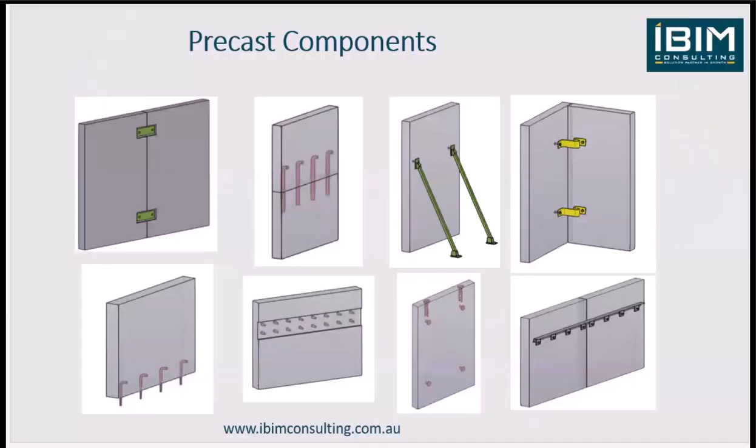Hi everyone. In this video, I'm going to show you how IBIM Consulting approaches precast detailing projects and how we stand out from our competitors.

These are the precast components generally applied to precast panels in the project: panel to panel fitting plate connection, panel grout tubes connecting two panels, panel rebate with ferrules, lifting tools, panel props, fire tie, and panel to raker connection.

Some of the connections are already available in Tekla as custom components, but we have developed in-house components to speed up the process. Let me show you—in the interest of time, I have already drawn the panels.

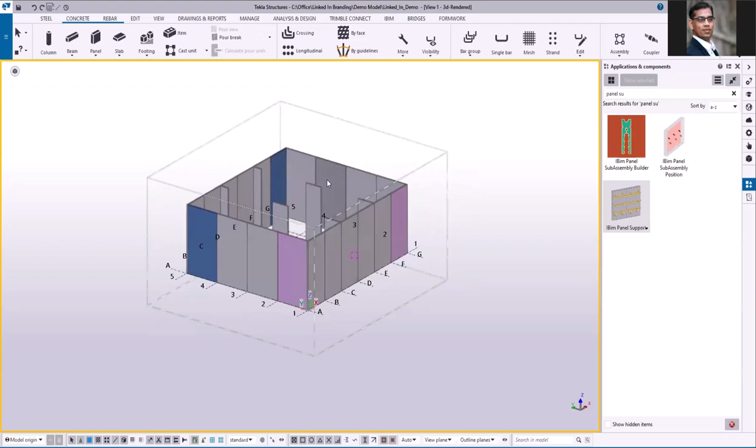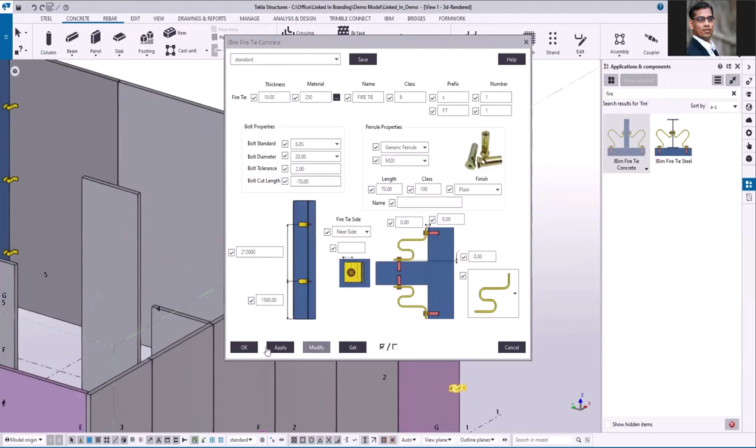If I have to create connections between corner panels, I can select these two panels and it will automatically create the fire tie connection. I can also use the same connection to connect these three panels.

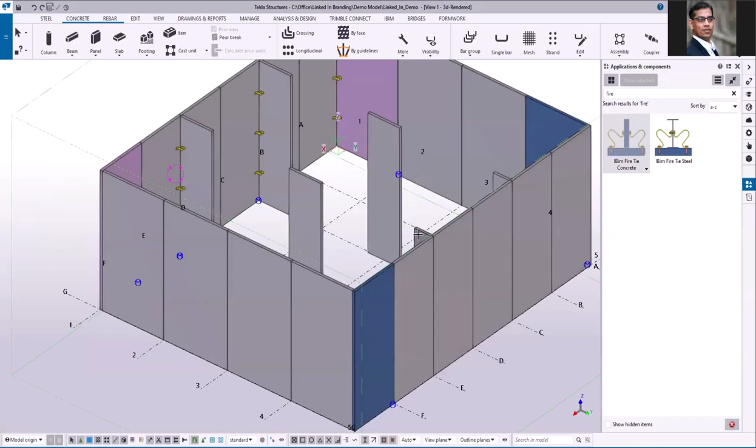The advantage of using this component is that it will also add ferrules to the respective panels, added as a sub-assembly, and it will read the top and form face, assigning the position as near side, far side, or both sides. Next, we will see how we can create a panel to raker.

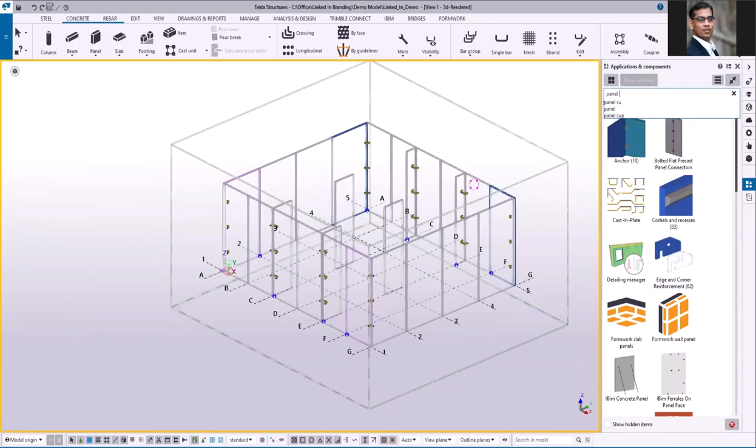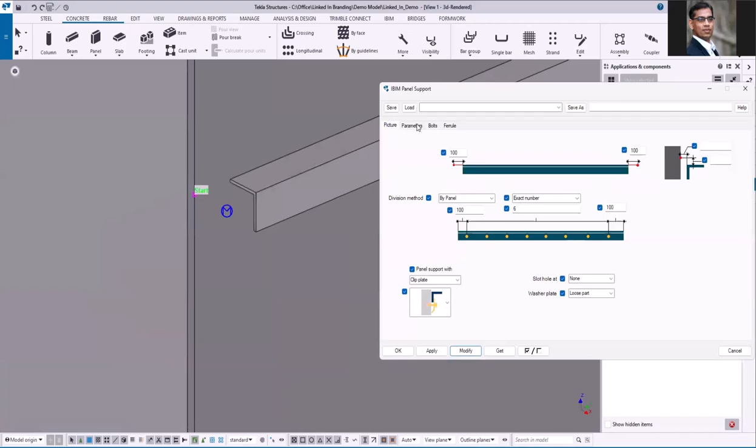Using the IBIM Consulting application, I'm going to pick these two panels, press the middle mouse button and pick the first point and second point. Let me double click and open the component, change this to inside, and then rotate.

This is quite common in warehouse projects where you will be placing the purlins on top of the raker. Let me select the next two panels—you can pick as many panels as you want.

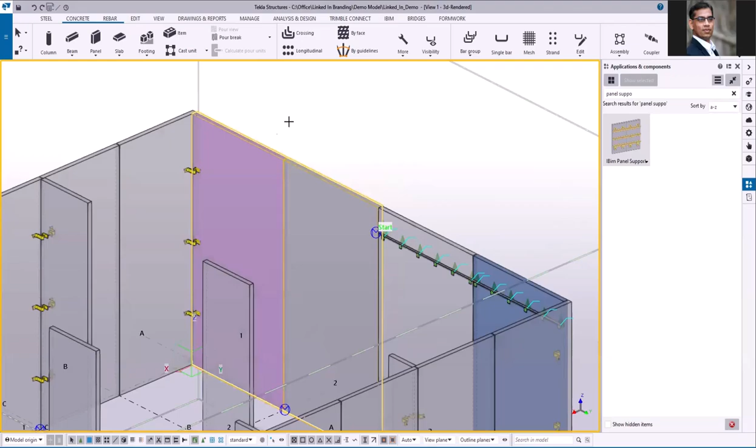If you want to change this to bolt instead of clip, I have an option here. And this has to be single side, not both sides.

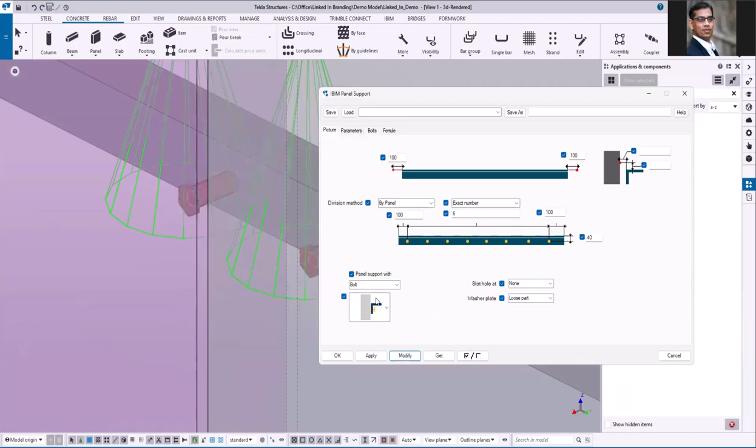Next, I'm going to show you how you can add panel props, grout tubes, panel to panel fitting plate connections, and lifting tools using one component.

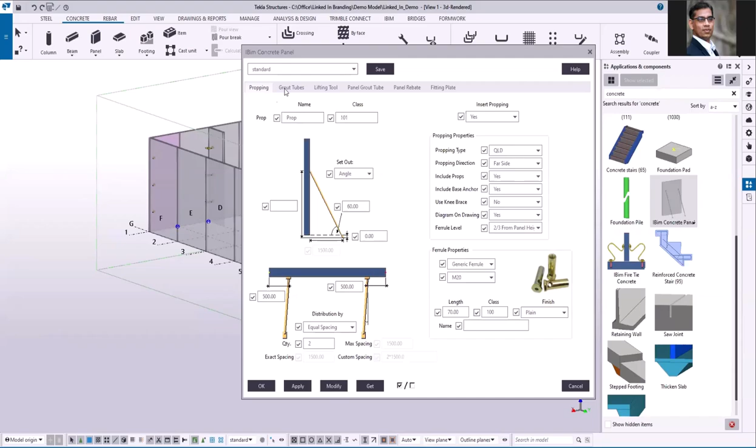So here is the application. You can see most of the panel components are combined into one application: propping, grout tubes, lifting tools, panel grout tubes, panel rebates, and fitting plates. You have options to create or switch off each component.

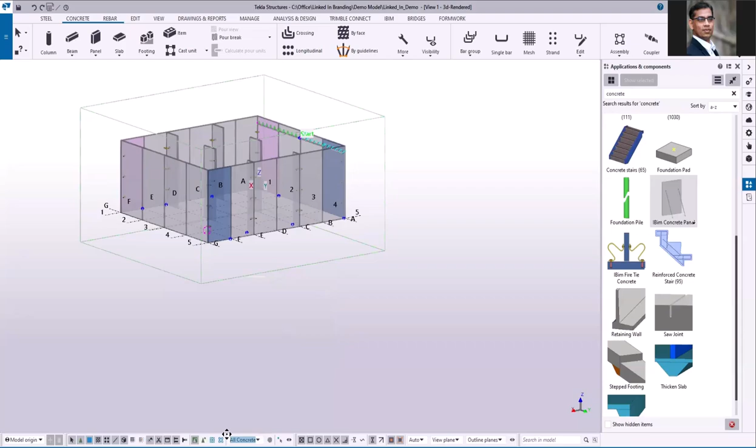Let me apply this component. I'm going to select only the panel, so I'm using a selection filter. Let me cross select all the panels, and with the click of a button, this will create all the panel components—panel props, panel to panel fitting plate connection, lifting tools, and grout tubes.

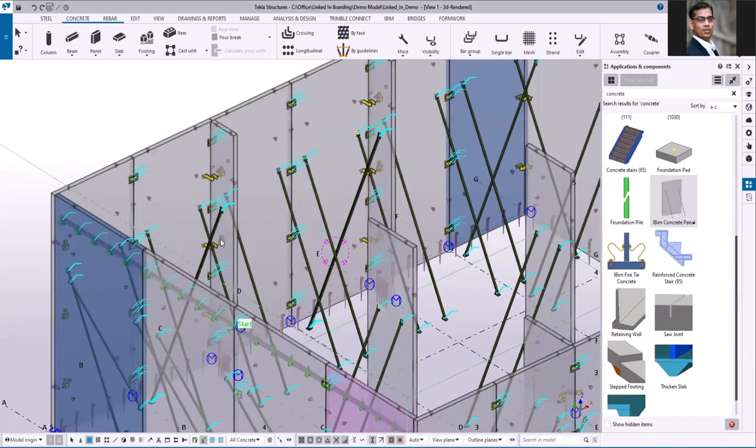If you want to make changes to any specific panel, after applying these components, it will give you an option to open the components of any specific panel. Just double click on it, and this will open only that particular panel's component.

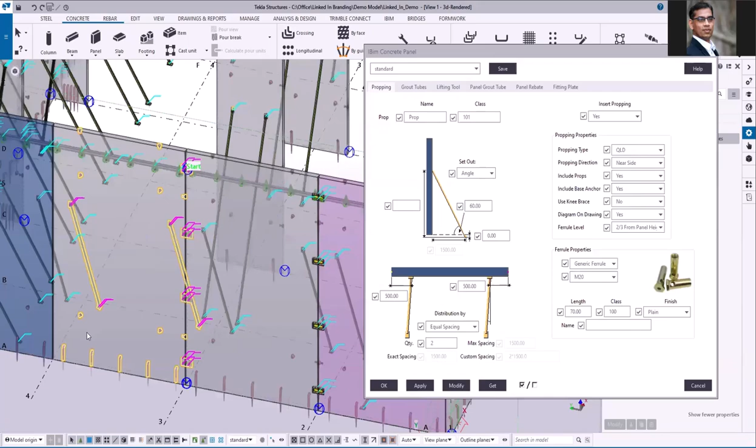For example, let me take this one, because in this case I don't need 5 grout tubes here. So once I double click on it, I'll go to the grout tubes, change this to 2, and modify.

Now you can see this takes less than 2 minutes for me to create all the panel components. I don't have to go back and check whether all the components have been added as sub-assembly and the position, whether it is near side or far side, because everything is built into the component.

This is how IBIM Consulting stands out from other competitors, because we use a lot of automation tools to speed up the process. So if you have any requirement for precast detailing, feel free to get in touch with us.